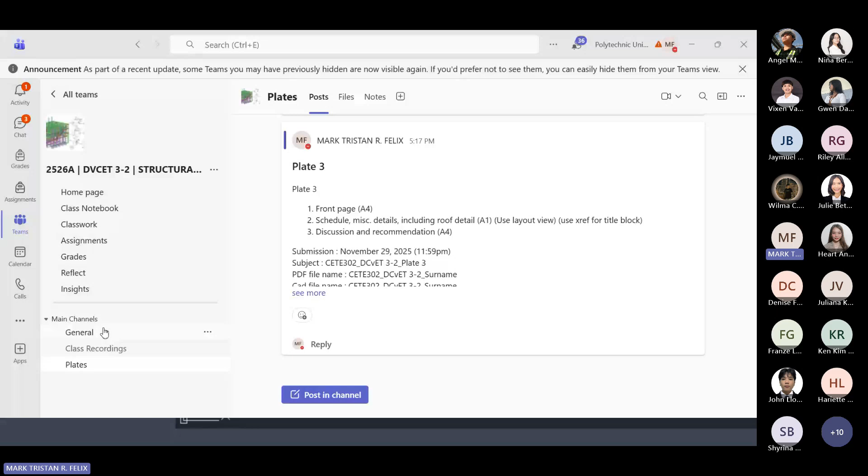That would be the last plate I'll require from you. Then the succeeding quizzes and exams, since we'll have our midterm on November 15, so it's just quizzes and the final exam. Let me go back to this announcement - midterm exam coverage includes all topics discussed for midterm, which covers up to module 4, up to what I discuss today. What I'll discuss next week won't be included anymore. So up to here only. Structural steel will be for finals, the finals part. Okay, let's proceed.

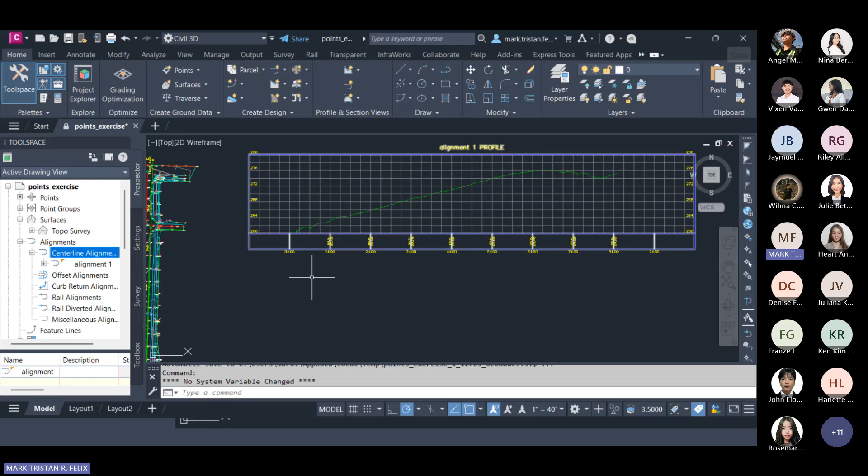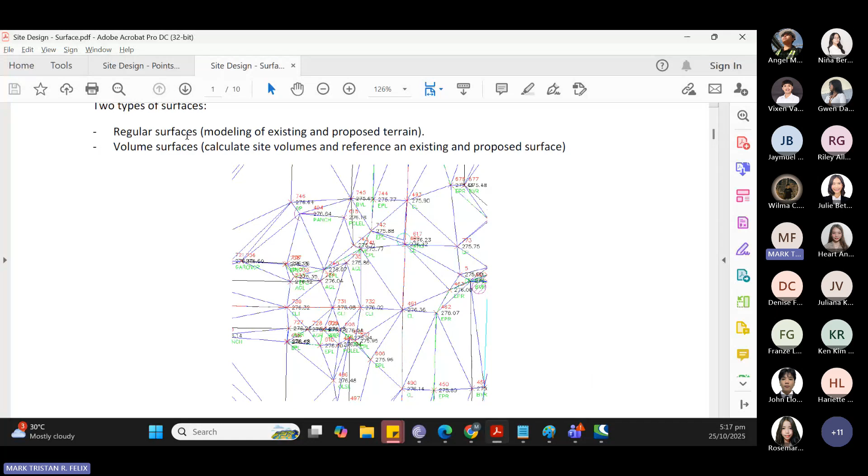This is the software from earlier. Okay, let me go with the lesson.

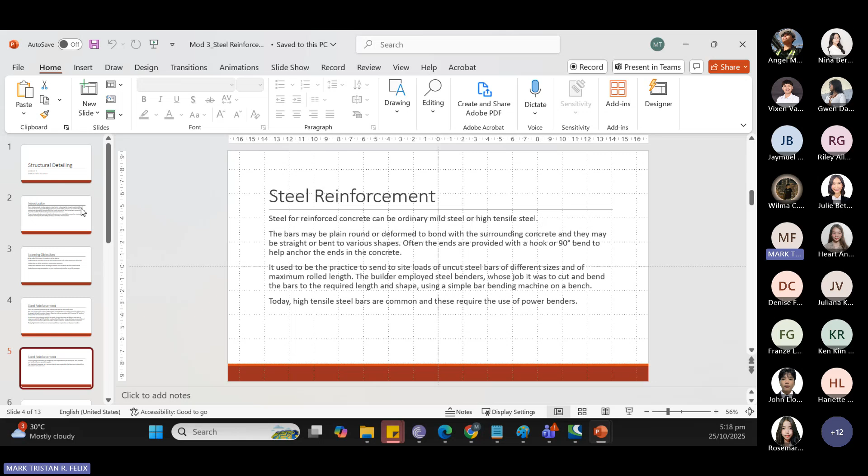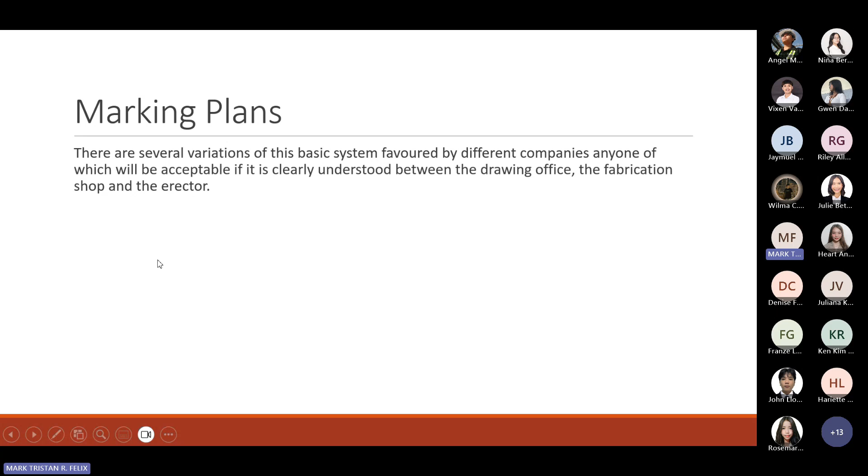Let's start with this - this is also our lecture from last time, I just added this in terms of marking the plan. So the marking of the plan depends on how the designer or the company doing the design marks their plans, whatever they prefer. So it can be done through a grid system.

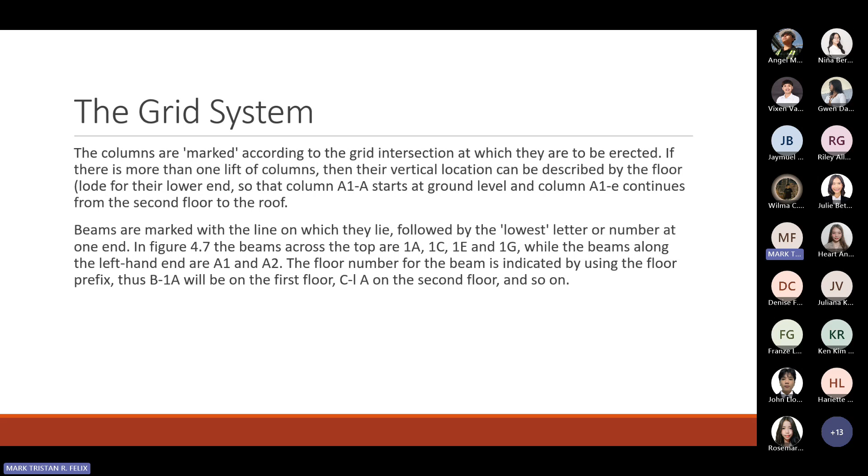Meaning you use the grid as your reference, for example grid A from grid 1 to grid 2. What's the example PDF? Let's open a sample file. From grid - let's see if this is okay. For example, this one.

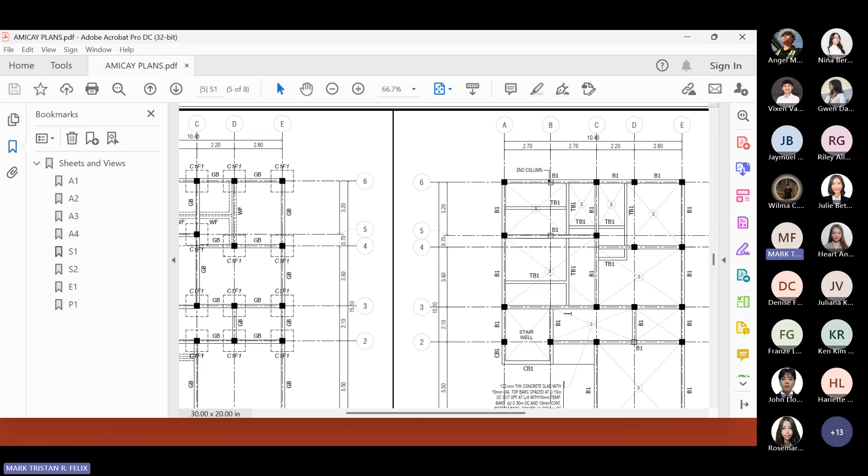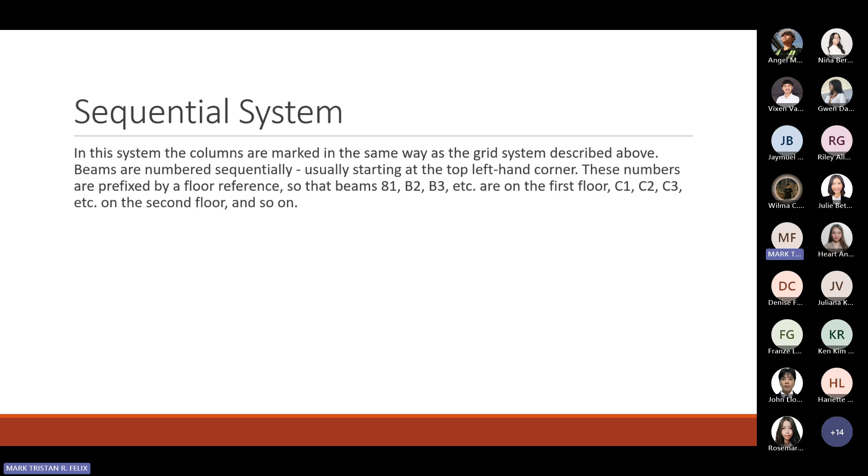Now, it can be grid system or sequential. This one is similar to grid but it's in sequence - C1, C2, depending on how it's sequenced. And then lastly, the piece mark - this is when many members of the structure are similar, so we use an identifier similar to this one. For example, all of them are B1, all TB1, so one marker is applied to many beams.

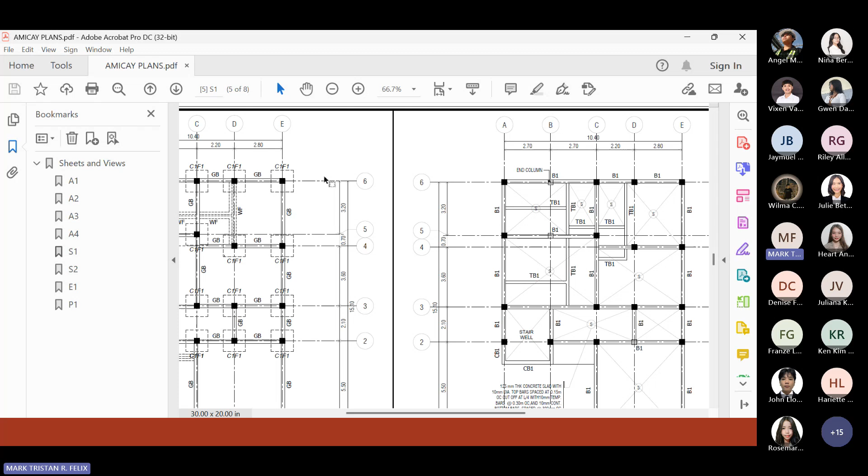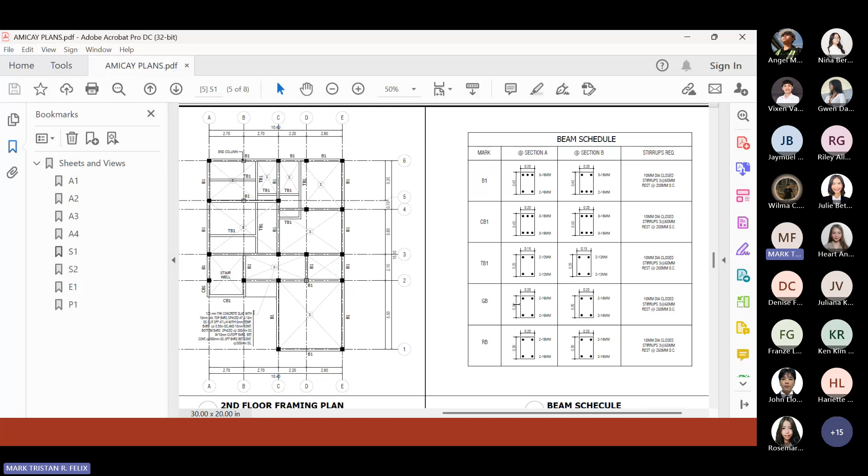That's all I wanted to add regarding the referencing of the schedule, because with this, our next plate will pertain to the schedule. So by just checking the plan and then checking the ID or identifier, you'd be able to determine through the beam schedule what its cross-section is and what information is within that. That's all I wanted to add to this PowerPoint.

And then the next topic is detail of reinforcement - let's discuss bond, development length, hooks, and splicing reinforcement. Let me read this: the bar stresses must be transferred to the concrete by bond between the steel and the concrete before the bar can be cut off. What that statement means is that the stresses within the beam that are supposed to act on the bar should be transferred between the steel and the concrete before you cut it.

If you compare these two drawings, the first one has a short bar, meaning there's no development length. That's called the development length - that is the distance, it's the distance back into the support and out into the beam to anchor them or develop their strength. So if it's not extended, there's no development length, meaning no matter how strong the material is, if it's not properly connected, there's a possibility that failure would occur where it's connected.

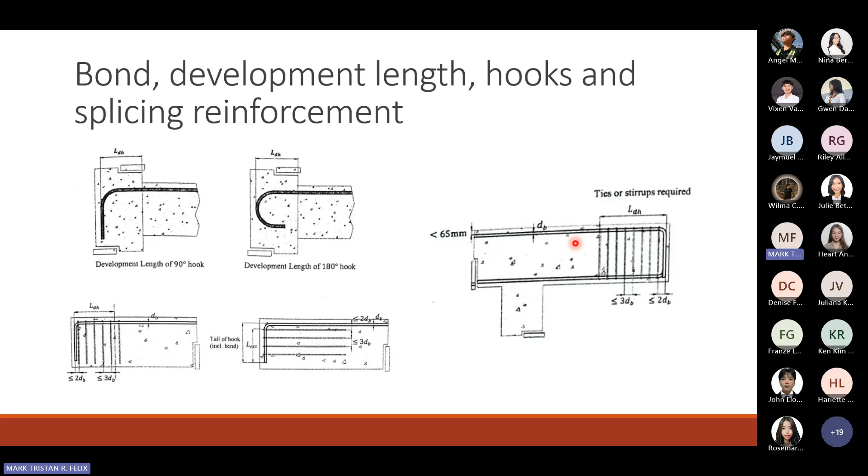And so on. Okay, so let's define first ano yung anchorage. So the forces in the reinforcing bar are safely transferred to surrounding concrete, so that the bars can fully develop, meaning allowing the rebar to reach its yield strength without slipping or pulling out. Ibig sabihin nito, ang tawag doon sa pagkakakabit ng bakal, let's say nung beam, yung main bar ng beam papunta sa column, is anchorage, kung saan dapat it is properly anchored para matransfer nung beam yung load papunta sa column, and at the same time ma-maximize niya yung strength niya by reaching its yield strength.

Okay. So whenever we discuss development length, meron tayong mga minimum length or extension of reinforcement for its peak stress. So minimum pwedeng mahaba, pero syempre di mo sobrang hahabaan kasi may kinalaman siya sa cost, syempre. So meron formula with that.

Now, you need to compare those for tension, you need to compare those values. The value that we computed using the formulas sa NSCP ng development length should not be less than 300 mm. Pag less than ang lumabas, kailangan mong gamitin yung minimum na 300 mm. Pero hindi ko na i-discuss sa inyo yung formula kasi medyo marami yun at mahaba. Hindi naman siya relevant sa subject natin kasi pang RCD yun eh. So more on basic information about that tayo.

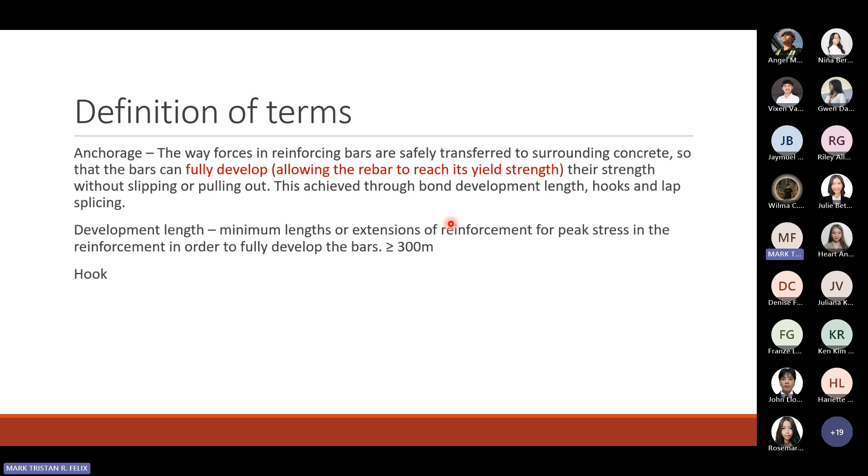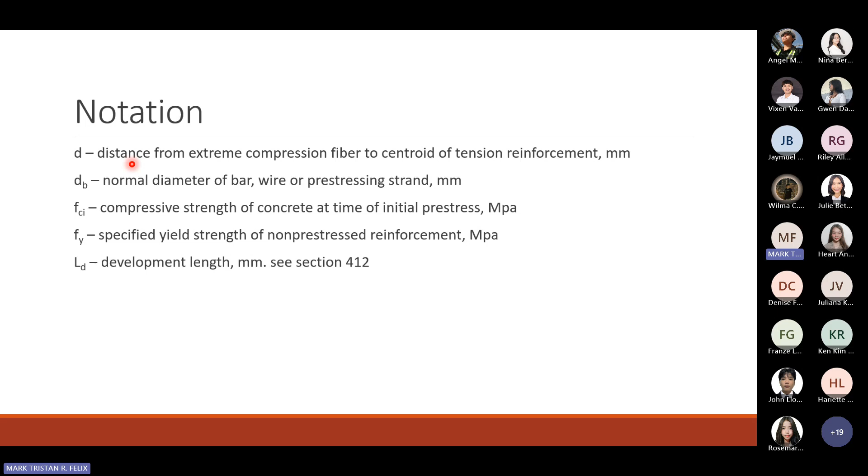Okay, for the notation, yung D, this is the extreme compression fiber to centroid of tension reinforcement. This notation is taken from NSCP. Then DB, this is the nominal diameter ng bar, wire, or the pre-stressing strand. FCI is the compressive strength of concrete at the time of initial pre-stress, kung pre-stress tayo. FY is the yield strength of the non-pre-stress reinforcement. And then lastly, LD is the development length. So yan yung mga mababasa nyo later na mga notation.

Okay, so for standard hooks and bends, if we have 90 degree, magsisimula yung development length niya, whether that's 12 db, 6 db, 8 db, and so on, from after nung curve. Kapag nakabend ng ganito, magsisimula siya after nung curve 10, example 4 db. And then meron din tayong 135 degree, ganito.

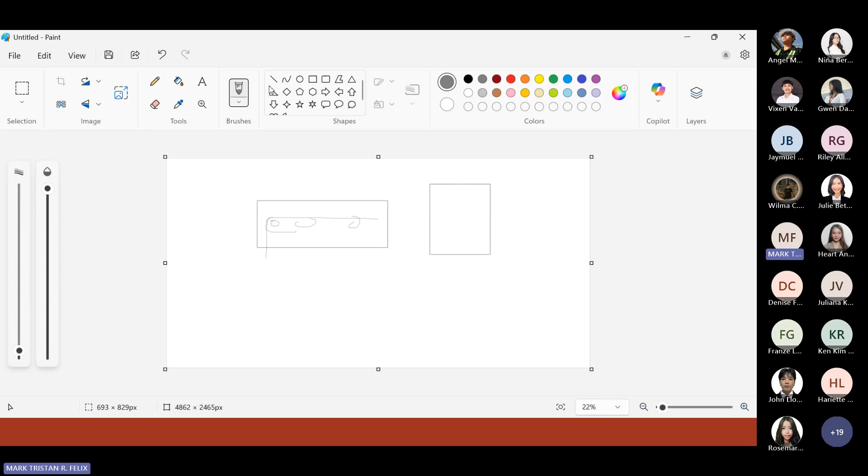Normally itong 135, makikita natin to sa stirrups. Yung ibang mga engineer, lalo yung mga luma, pag nagpagawa sila ng bakal, naka 90 lang, yung stirrups nila. Tapos pupuluputan na lang dito ng alambre, kasi minsan matigas talaga yung bakal, hindi mo na kayang i-bend.

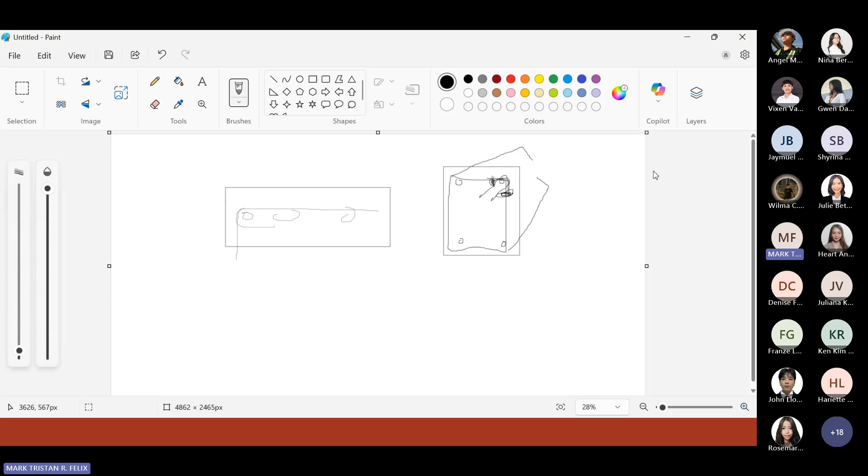Ang sabi ng iba, kapag nagkaroon ng earthquake or may possibility, kung hindi maayos yung pagkakakabit nito, pwedeng pumitik yan, bubukas ng nakaganon. Isipin nyo matatanggal to, bubukas ng nakaganyan, so pwedeng magka-failure, masira yung structural member. Now, suggestion ng iba, or the recommended suggestion here, is that to avoid this, 135 na lang siyang nakaganon. Kumbaga parang nakaganon yung ano natin, yung stirrups, makikita niyo yan dun sa mga plans nyo, nakaganito.

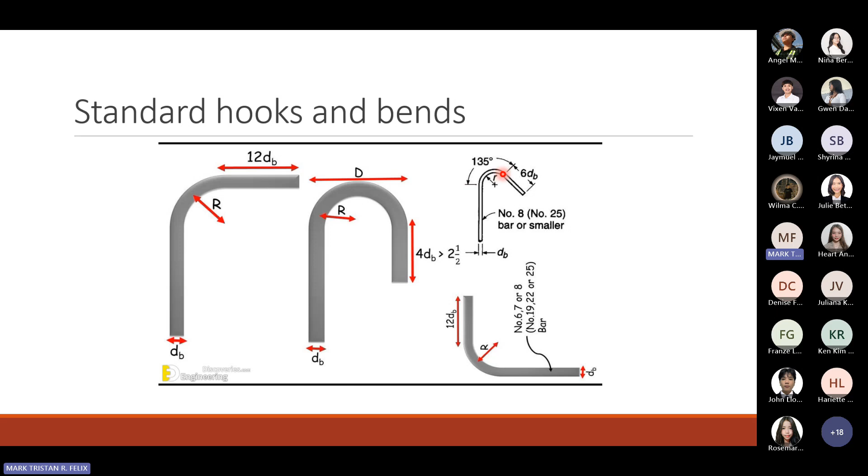Okay, so ganun din naman, after the curve tsaka magsisimula yung development, like yung bends natin dyan. Okay, so for the main bar, based on the code, kung 180 degree bend, meron tayong plus 4 dB, dB is the diameter of the bar. Ayan siya, but not less than 65 mm at free end of the bar, so sa free end, ayan dito.

Then 90 degree bend naman, so that's 12 dB for the main bar. Okay, so for the minimum bend, ito yung clauses niya sa NSCP, measured inside of the bar, other than for stirrups and ties in sizes 16 mm shall not be less than the values sa 407-1. Ito naman, if ties shall not be less than 4 dB for 16 mm and smaller, bars larger than 16 mm diameter of bend shall be in accordance, again sa same table, and so on.

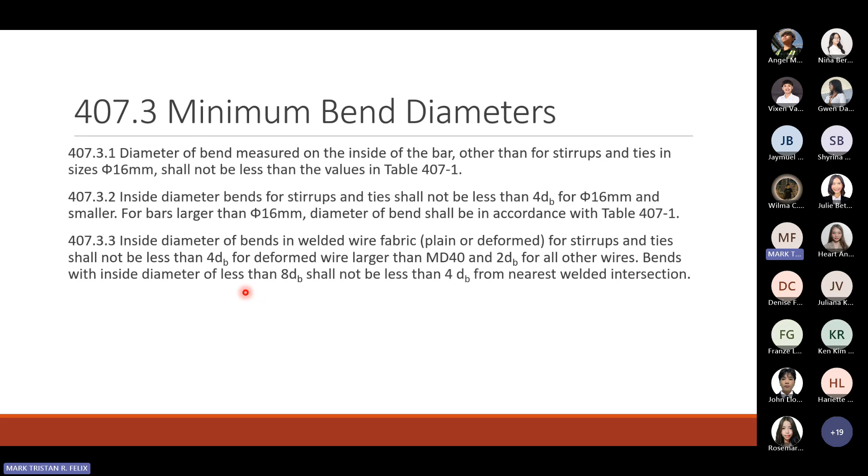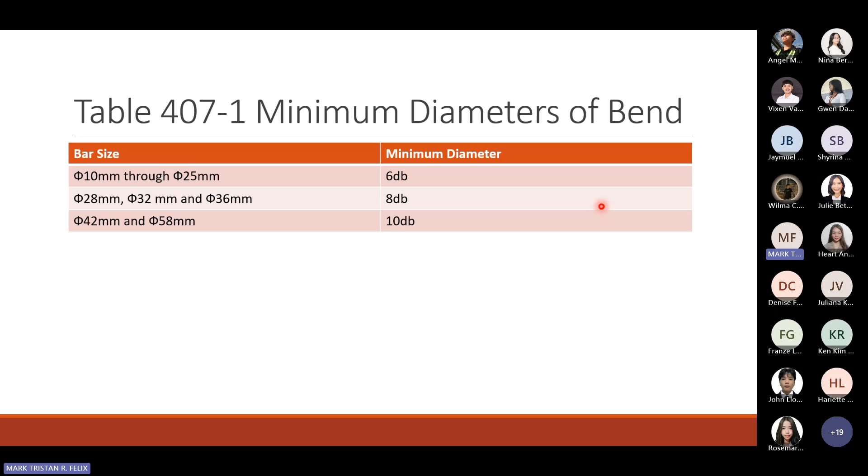So para maintindihan natin to, ito yung table niya, yung 407-1. Kapag ito yung sizes natin, 10 to 25, that's 6 dB for the minimum diameter, depende sa bend. Kapag 28 to 32, 28, 32, and 36, that's 8 dB. Class ano yan ha, walang 29, 30, 31, okay so that's yung market size. And then 42 and 58, that's 10 dB. So ito din yan, ito.

Then for 25mm or lower, or for all sizes from 25 down, at 135 degree bend, similar to what I showed you earlier, the length will be 6 db. This is the same as what we discussed earlier - 6 db also for ties.

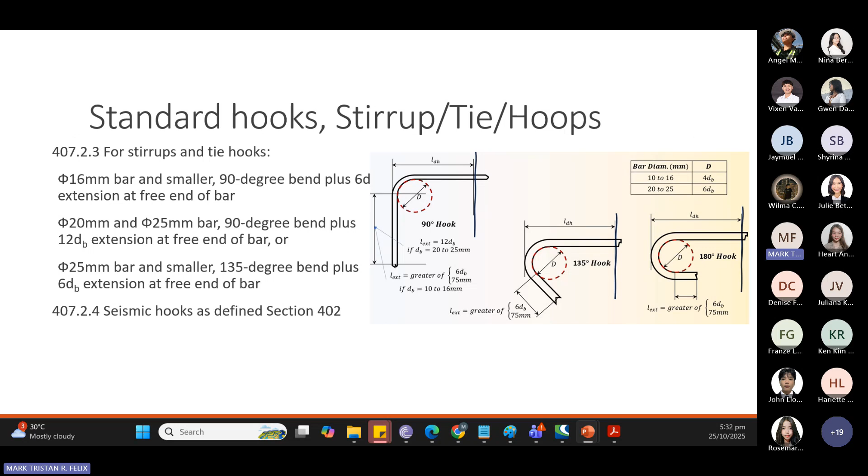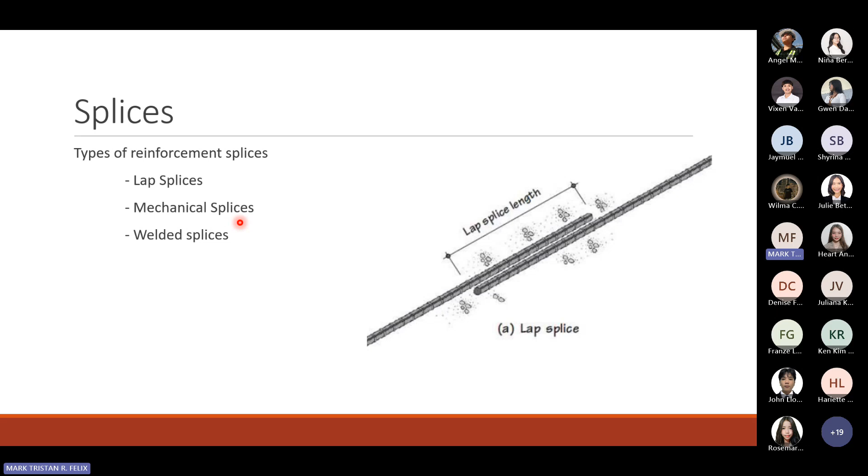That's for stirrups, the hook, and the development length. Now let's go to splices. In splices, we normally do this when the rebar is too short. But we don't just splice anywhere - we have strategic locations. Before that, there are at least 3 types of reinforcement splices: first, the lap splice like this, mechanical splice, and welded splice. We will just discuss the lap splice.

Per consideration, the location of the lap splice should be away from the maximum stress or maximum bending moment. We get the maximum moment on a beam, if you recall from theory of structures. Make sure the location of the lap does not fall under the location of maximum moment, because there it's no longer a question of whether the rebar can withstand the stress, but more about the connection - how you connected it. So to avoid that, we don't place splices there since it's quite risky.

Now, as much as possible, stagger the location of splices wherever possible. Lap splices in tension are classified as Class A or Class B. You can determine the class of your splice - it's Class A if 1 times LD, the computed development length, is greater than or equal to 300. It's Class B if 1.3 times LD is greater than or equal to 300. That's how you can categorize it.

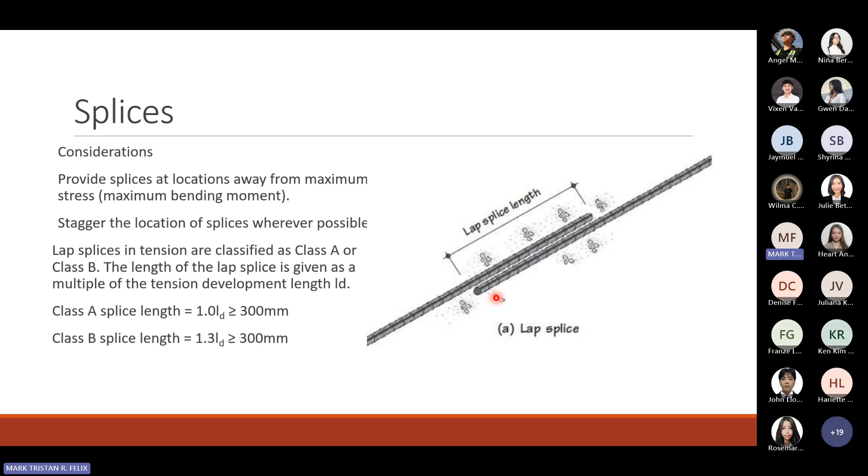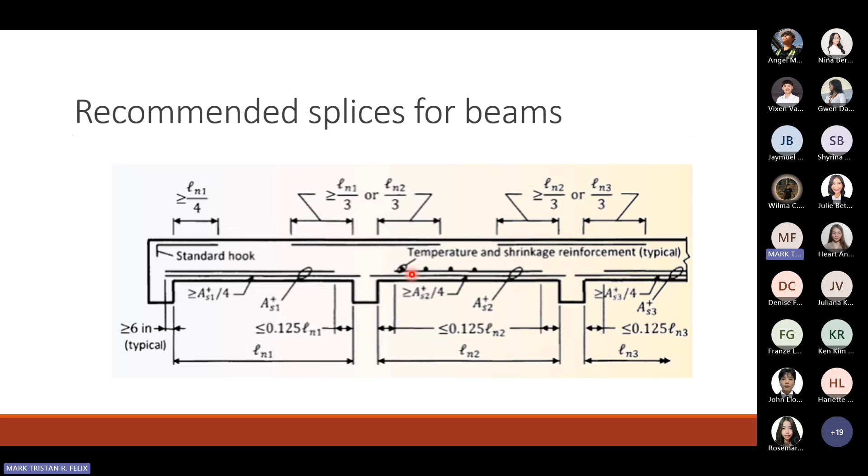For the recommended location of splices, based on the maximum bending moment, it should be far away. This is the recommended location from the face of the supports - it can be 1/4 of the entire length or 1/3 of the entire length. For outer support, that's 1/4. For inner support, that's 1/3. At the bottom, it should be less than or equal to 0.125 span of the beam. These are the rebars here - we have the standard hook, the temperature and shrinkage reinforcement, and also the main bars.

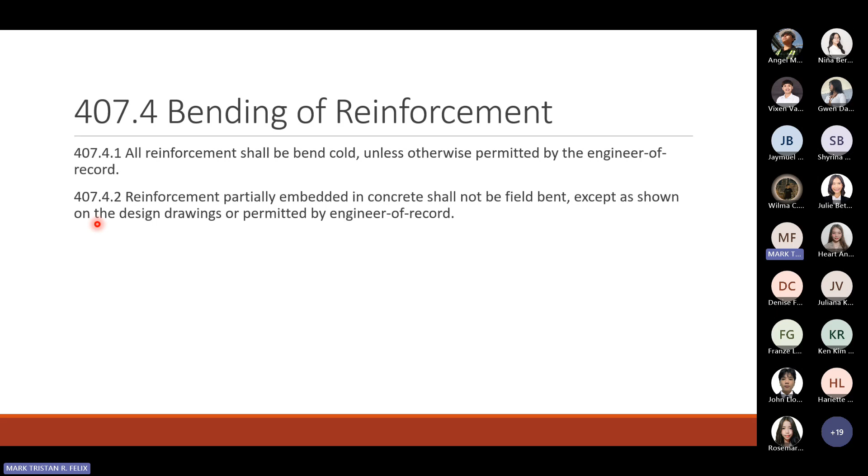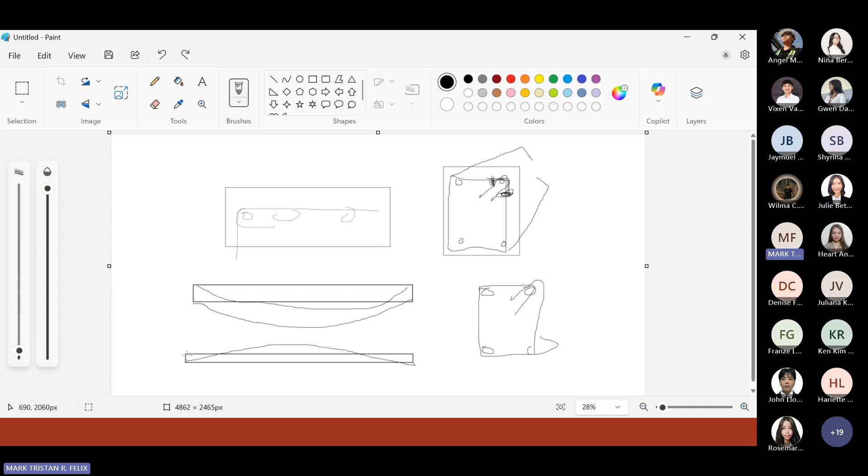The reason why we apply pre-stress is para ma-minimize natin yung deflection. Kasi kapag normal na non-pre-stress, rectangular siya, tapos pagka nag-deflect siya, magde-deflect lang talaga siya, diretso na. Pero kapag nag-pre-stress ka, rectangular, tapos pag binitawan mo yung tendons, nakaumbok siya pataas. Hindi naman significant yung pagkakaumbok niya, pero more uumbok siya ng konti. Calculated naman yan, para pag nag-apply ka na ng load dito, so magpa-flat muna siya bago magsimula mag-deflect, tama? Kesa ganito, so deflect kagad siya. So yun yung explanation why we apply pre-stress.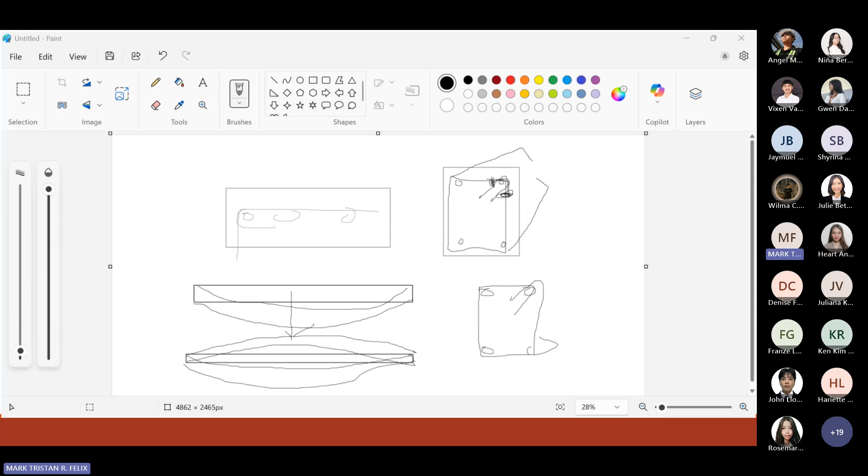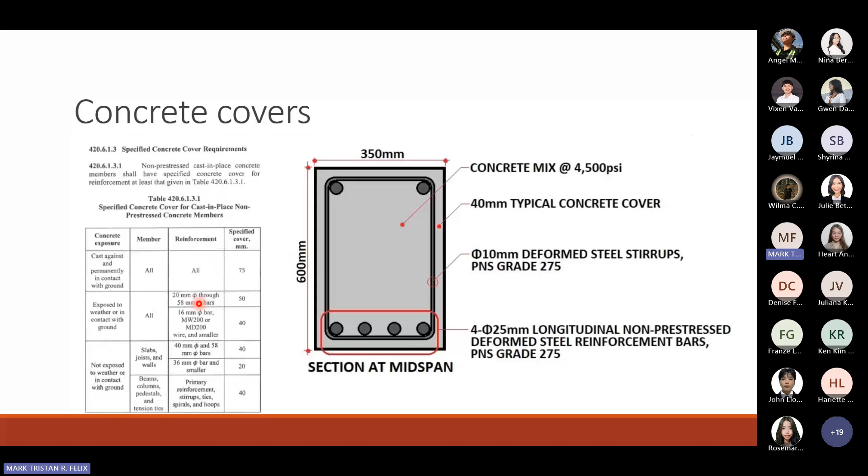Okay, so for cast in place pre-stress, depende again sa same condition ng concrete exposure, depende sa member of the structure, at depende sa size ng reinforcement or type ng reinforcement. So this is the concrete cover. Pero normally dito lang tayo kasi ang gumagamit nito ay mga malalakihang construction o malalakihang projects. Kasi pang mga bahay, syempre, ganito lang yan.

Now, meron naman tayong precast. Kung yung isa, cast in place pre-stressed, ito naman, precast, non-pre-stressed, or pre-stressed. So basically, if we are dealing with yung mga pinirepair off-site, hindi binuhusan on-site, katulad ng mga kinakabit sa mga skyway, mga walls na ikinakabit sa mga condominiums, so those are precast, can be non-pre-stressed or can be pre-stressed. Again, ang difference ng non-pre-stressed sa pre-stressed is isa tendons ang ginagamit ng pre-stressed. Non-pre-stressed is deform bars, yung rebar na normal na nakikita nyo sa hardware.

So kapag precast naman, eto naman yung criteria niya: depende sa type ng member, depende sa exposure, at depende sa size ng reinforcement. So eto yung mga concrete covers niya. Then again, this is how the pre-stress works.

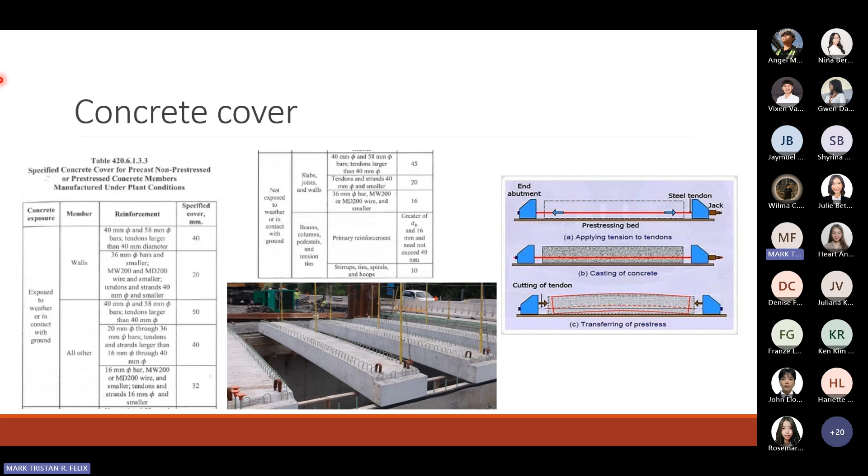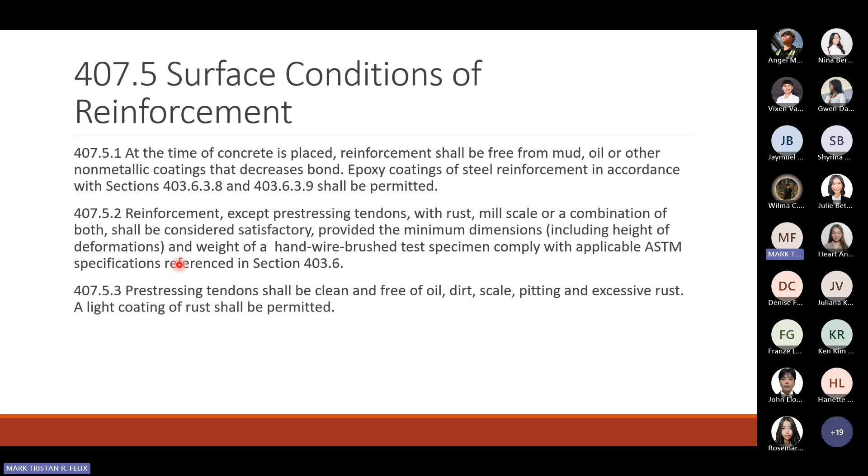Then ito naman, for the reinforcement, except pre-stressing tendons, yung mga may kalawang, mill scale, or a combination of both shall be considered satisfactory as long as it can provide the minimum dimension and pasado pa din sa ASTM. Yung mga may kalawang, as long as hindi naman din significant yung effect.

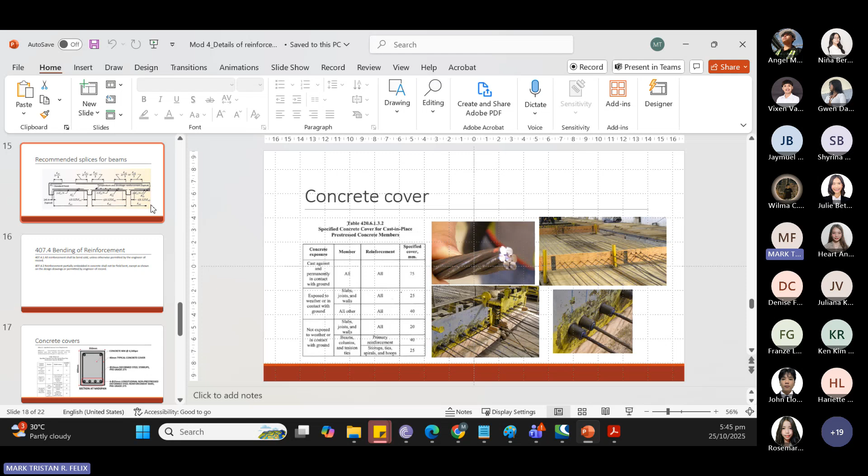Sir, excuse me po, nakamute po yata sila. Ay sorry, nakamute nga. Nako, ang haba na sinabi ko. Teka lang, nasabi ko ba to? Saan ako nakaputol? Baka anyone can dito, na-discuss ko ba to yung concrete cover? Kung may nakikinig, ulitin para alam ko kung saan ako uulit. Sir, dun lang po sa last slide po, dito sa placing. Tama? Opo sir, baka napindot ko.

Sige, alright. So going back with the placing of concrete. Ito naman, whenever we placed concrete, reinforcement sa formworks and then bago buhusan ng concrete, it should be accurately placed. So kung paano yung spacing, kung paano yung concrete cover dapat na address natin and accurately placed. Ito yung ibig natin sabihin dito, unless otherwise specified ng engineer of record if meron tayong tolerances with this one.

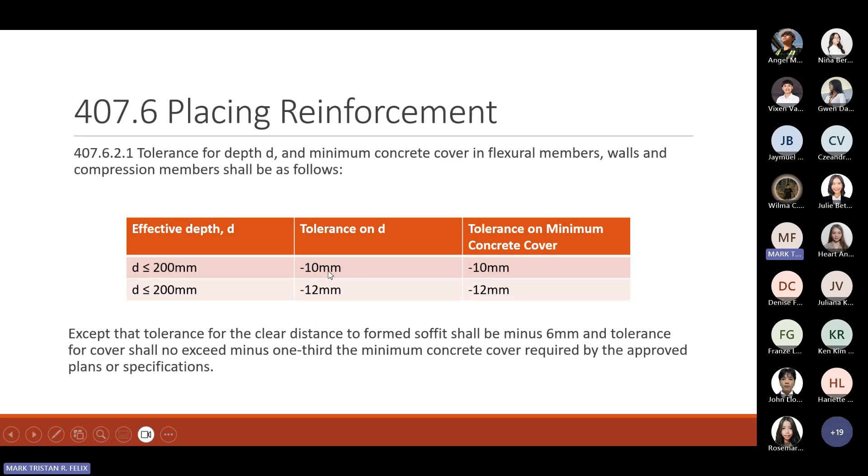Now, for the tolerances, so there's a tolerance depth for the minimum cover in flexural members, walls, and compression members. I'll just check this if this is greater than, i-double check ko to, i-update ko to. Pero what is this table is referring to is that there are tolerances from 10 mm to 12 mm, as long as provided na approved tayo ng engineer of record.

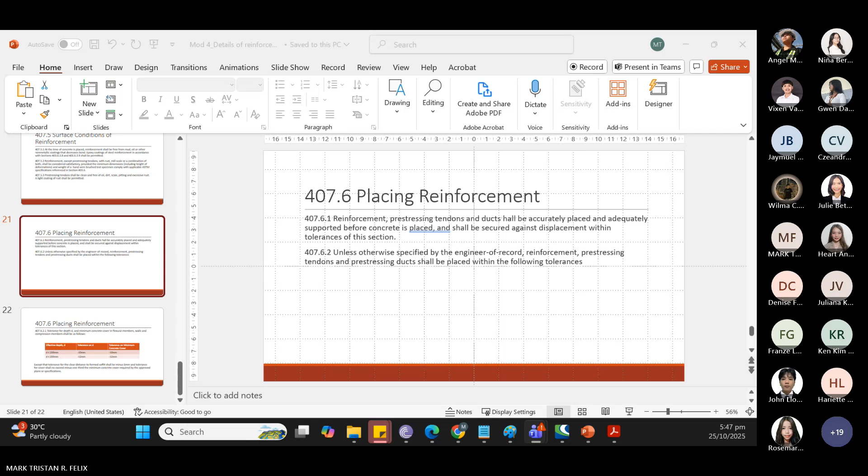Ayan, para hindi na masyadong humaba yung yung.